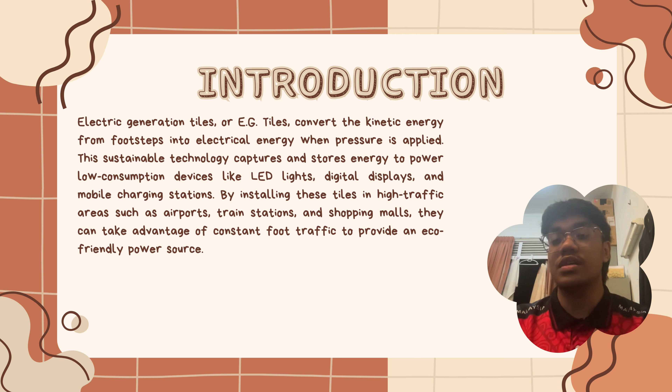So, electric generation tile, or we call it EG tile, converts the kinetic energy from footsteps into electrical energy when the pressure is applied. This sustainable technology captures and stores the energy to power low consumption devices like LED lights, digital displays, and mobile charging stations. By installing these tiles in high traffic areas such as airports, train stations, and shopping malls, they can take advantage of constant foot traffic to provide an eco-friendly power source.

Our research background is to develop an innovative electric generator tile using a crank and slotted lever mechanism instead of piezoelectric materials. As people walk on these tiles, their foot pressure activates the lever system, converting kinetic energy into electrical energy. Unlike traditional piezoelectric flooring, which is costly and faces efficiency and durability challenges, this alternative design offers a simpler, more affordable solution by utilizing physical displacement.

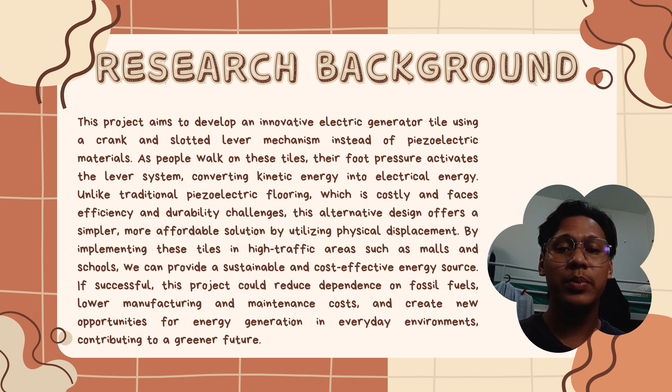By implementing these tiles in high traffic areas, such as malls and schools, we can provide sustainable and cost-effective energy sources. If successful, this project could reduce dependence on fossil fuels, lower manufacturing and maintenance costs, and create new opportunities for energy generation in everyday environments, contributing to a greener future.

Our problem statement is, with the limited supply and environmental impact of traditional energy sources, the need for sustainable alternatives is becoming increasingly important. Electric generation tiles offer a promising solution by converting the kinetic energy of footsteps into electrical energy. However, several challenges must be addressed, including energy conversion efficiency, durability, affordability, and integration with existing power systems.

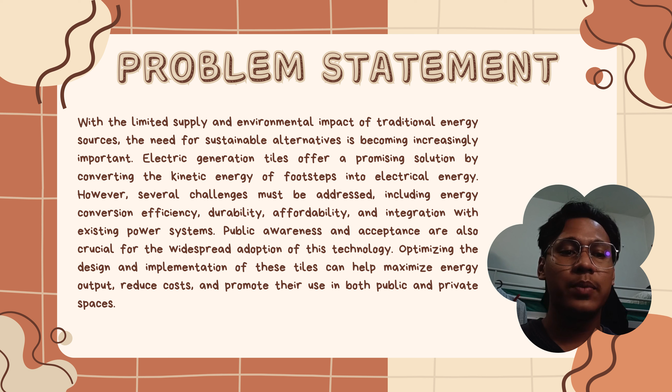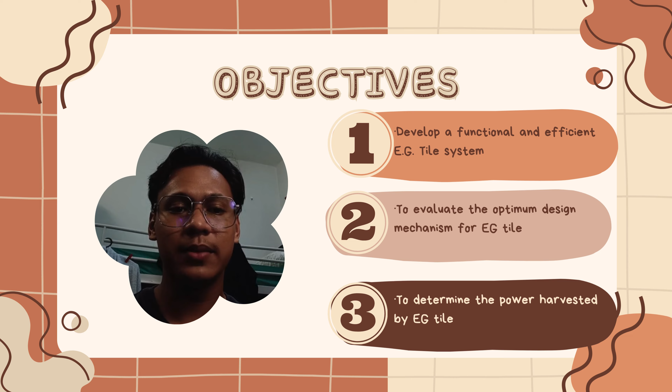Public awareness and acceptance are also crucial for the widespread adoption of this technology. Optimizing the design and implementation of these tiles can help maximize energy output, reduce costs, and promote their use in both public and private spaces. Our objective is to develop a functional and efficient EG tile system. Number 2, to evaluate the optimum design mechanism for EG tiles. And lastly, to determine the power harvested by the EG tile.

Our project scope is focusing on developing an innovative EG tile system that converts kinetic energy from footsteps into electrical energy. The design includes a functional prototype capable of generating 12-volt DC electricity, featuring a stepping plate decorated with mosaic elements as the user interface. To enhance the durability and efficiency, a customized 3D printed mechanism is incorporated.

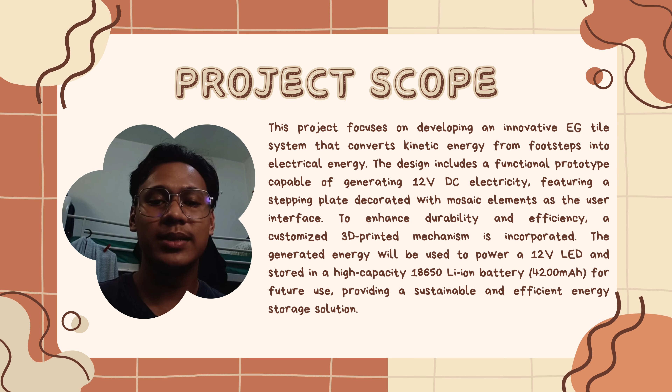The generated energy will be used to power a 12-volt LED and be stored in a high-capacity 18650 lithium-ion battery for future use, providing a sustainable and efficient energy storage solution. The EG tile system is expected to significantly reduce the carbon footprints of facilities by harnessing renewable energy from kinetic motion. This adaptable solution can be installed in various locations, especially in high foot traffic areas. By capturing energy from everyday activities, the EG tile system promotes a more sustainable and eco-friendly approach to energy consumption.

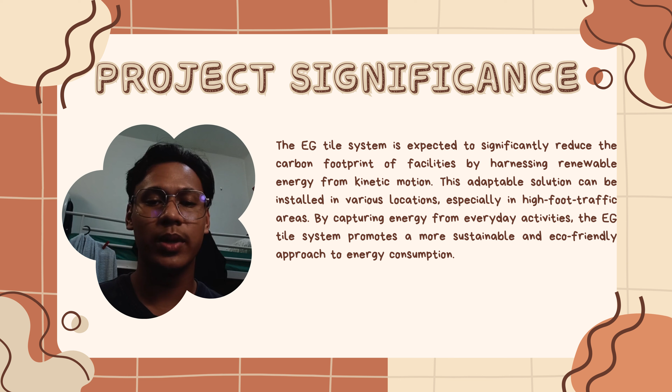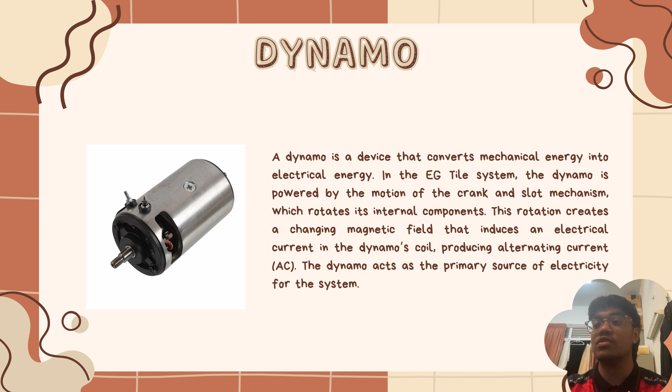So, the components in our project include a dynamo, crank and slot mechanism, gear, spring, bearing, and also an electric circuit. So, what is a dynamo? A dynamo is a device that converts mechanical energy into electrical energy. In the EG tile system that we use, the dynamo is powered by the motion of the crank and slot mechanism, which rotates its internal components. The rotation creates a changing magnetic field that induces an electrical current in the dynamo's coil, producing alternating current. The dynamo acts as the primary source of electricity for the system.

Our group has decided, instead of piezo, to use the crank and slot mechanism. Crank mechanisms are essential in many mechanical systems, converting rotary motion into linear motion or vice versa, and are widely used in various industries. Basic crank mechanisms are found in engines and manual devices, while slider crank mechanisms are used in piston engines and pumps for efficient energy transfer. The bell crank mechanism, with two arms positioned at a right angle, alters motion direction in aircraft control. The Scotch yoke mechanism provides smooth sinusoidal movement, ideal for internal combustion and steam engines.

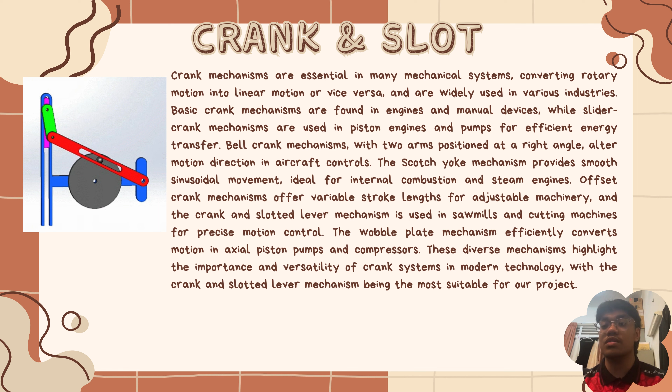The offset crank mechanism offers variable stroke length for adjustable machinery, and the crank and slotted lever mechanism is used in sawmills and cutting machines for precise motion control. The wobble plate mechanism efficiently converts motion in axial piston pumps and compressors. These diverse mechanisms highlight the importance and versatility of crank systems in modern technology, with the crank and slotted lever mechanism being the most suitable for our project.

So, what about gears? Gears are used to transfer motion and torque between parts of a machine. They have teeth that mesh with other gears to transmit rotary motion. Gears can change speed, increase or decrease torque, change the direction of movement, and help transmit power. Different types of gears such as spur, helical, bevel, and worm gears are used for specific tasks, making them essential in machines like cars, clocks, and engines.

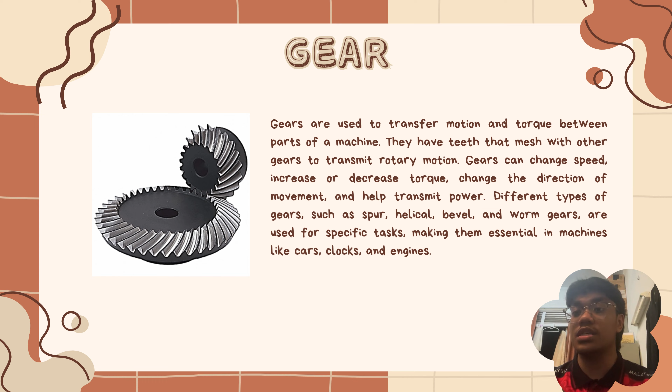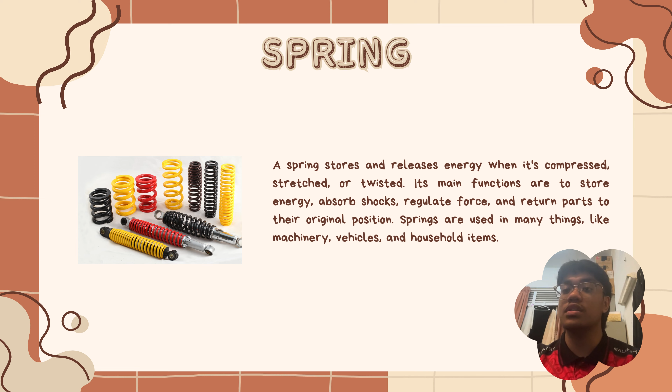Spring. A spring stores and releases energy when it is compressed, stretched, or twisted. Its main functions are to store energy, absorb shocks, regulate force, and return parts to their original position. Springs are used in many things like machinery, vehicles, and household items.

The most important part of our component is also a bearing. A bearing reduces the friction between the moving parts, making movement smoother. It supports weight, helps distribute loads, and allows the parts to rotate or move easily. Bearings are used in many machines like motors, wheels, and fans.

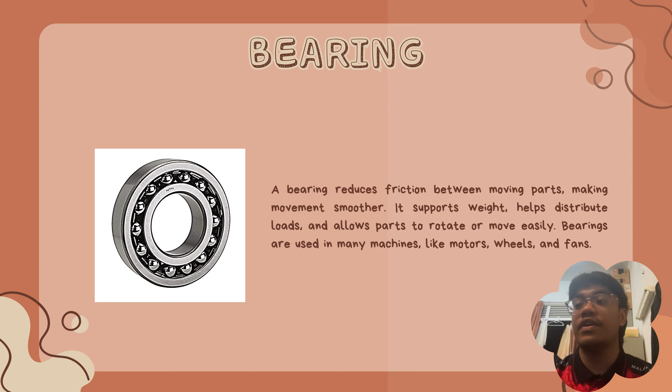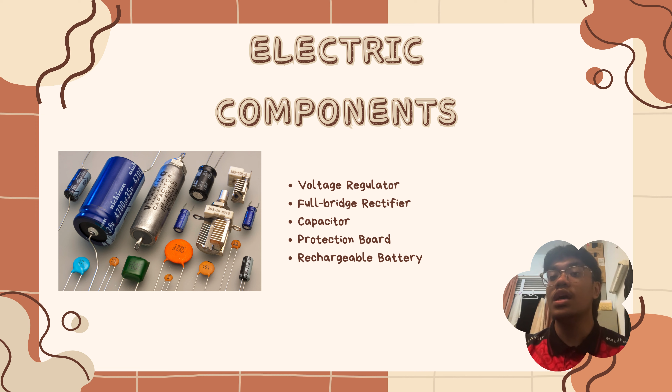And the last one will be electric components. So we decided to use some of the electric components that mainly function well in our project, which are the voltage regulator, full bridge rectifier, capacitor, protection board, and also the rechargeable battery.

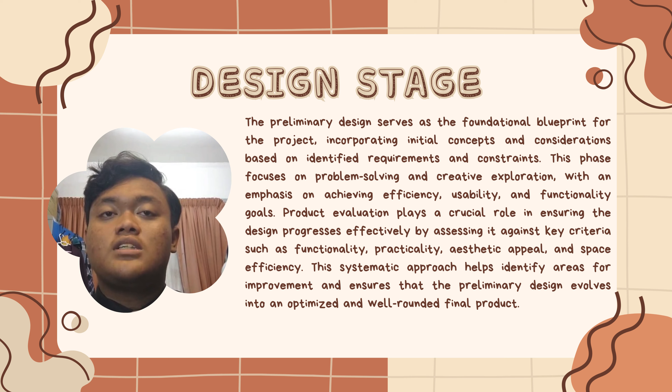Today I will present design stage and mechanism design. So what is design stage? Design stage is the stage that forms our foundational blueprint for the project. This stage incorporates initial concepts and considerations based on identified requirements and constraints. This stage focuses on problem solving and creative exploration. This stage helps us to identify areas for improvement and ensure that our preliminary design is optimized in our final product.

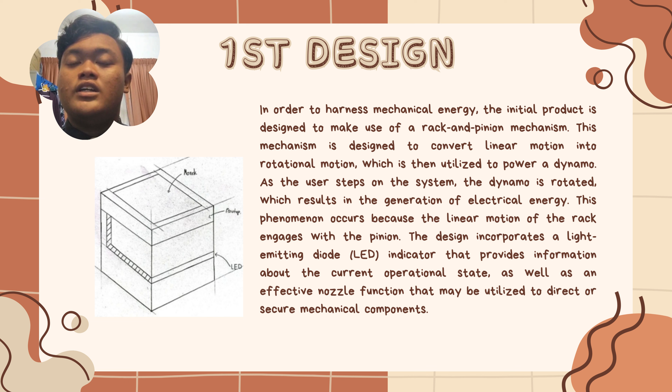In total, we have 3 designs, and this is our first design, suggested by me. I suggest using a rack and pinion mechanism, which converts linear motion to rotational motion. This rotational motion will be converted into electricity by using a dynamo. In this design, I also include LED strips that will indicate that our product is producing power.

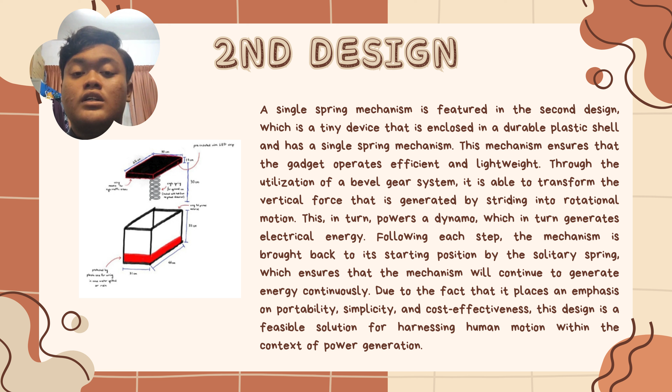This is our second design, suggested by Izwan. Izwan suggests using a single spring mechanism connected with a bevel gear system that will turn the dynamo and produce electricity. This is our third design. This design uses a rectangle design and 4 spring mechanism. The tile on top of it is connected to a multiple bevel gear mechanism. This multiple bevel gear boosts rotational speed and energy output for the best performance.

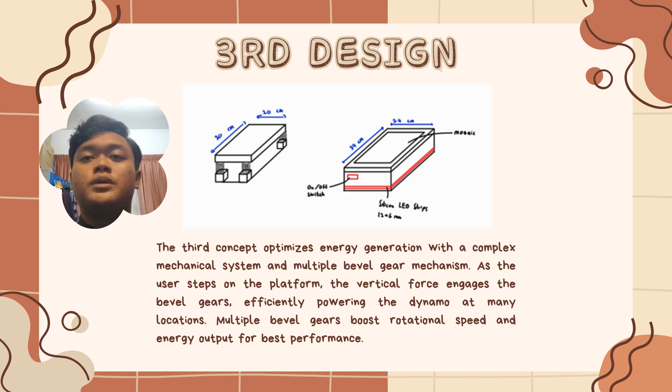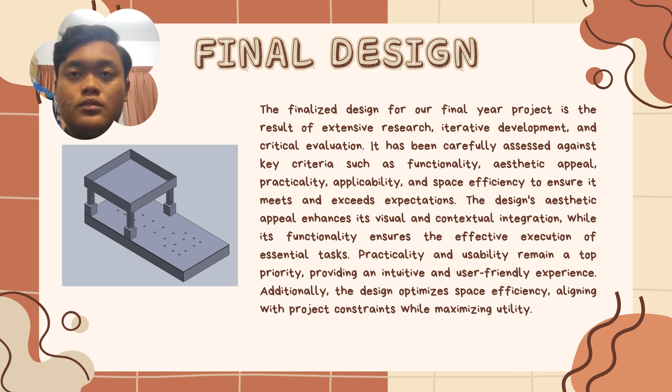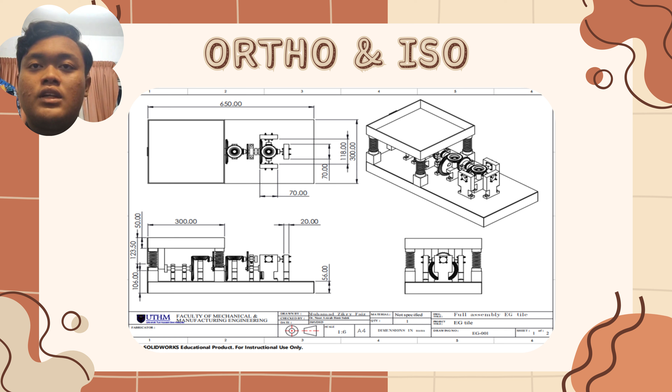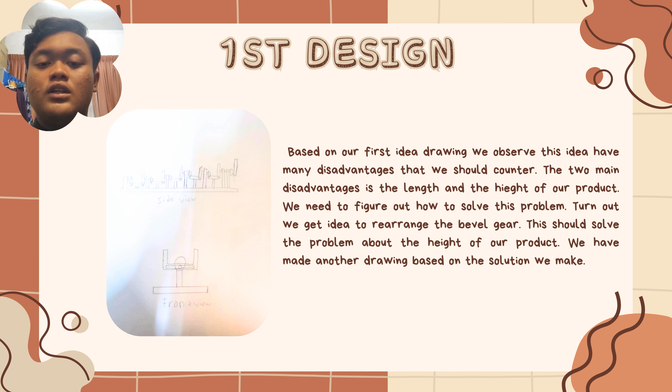Next, mechanism design. So in this project, we have changed our mechanism design 3 times. So this is our first design. We are using only bevel gear in the normal position. In this design, we found out that it takes a lot of space in terms of length and height.

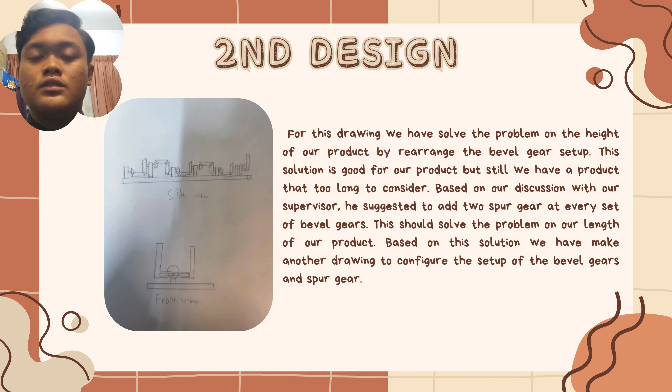So this is our second design. We use bevel gear, but this time we change the position. So we change the horizontal bevel gear position. First we put it at the bottom, and then for the second set we put it on top. So we repeat this position until the end of our bevel gear. We found this design has solved the height problem, but this product is considerably long. So we need to solve this length problem.

So this is the third and last design for our mechanism. We only use bevel gear and spur gear. For the bevel gear position, we put the horizontal bevel gear at the top, and the small vertical bevel gear is connected to a shaft that has a spur gear on it. We only use 3 sets of bevel gear and 2 sets of spur gear. In this design, we have solved the problem: we have cut the height and the length of the product.

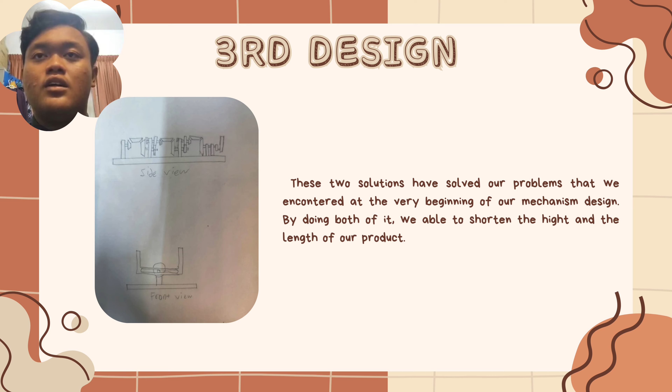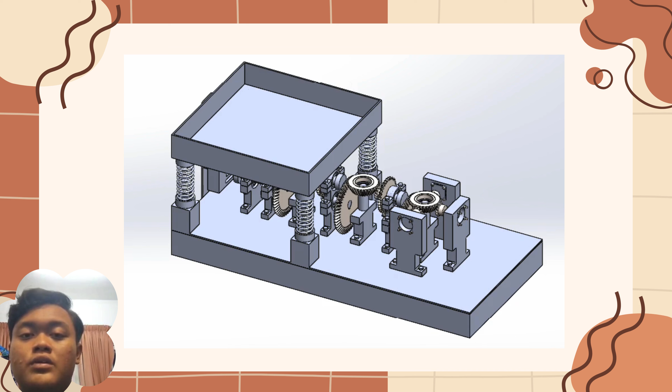This is our animation. So we arrive at the conclusion. The electric generator tile project demonstrates the potential of harnessing kinetic energy from foot traffic as a sustainable energy solution. By using a crank and slot mechanism instead of traditional piezoelectric materials, the project effectively addresses cost, durability and efficiency challenges. Through careful material selection and iterative improvement, the design is optimized to generate and store electrical energy for low power applications such as LED lighting.

The successful implementation of EG tiles in high foot traffic areas like schools and malls can contribute greatly to renewable energy efforts and help reduce carbon footprints. Future improvements could enhance the energy conversion efficiency, optimize the design for mass production, and maybe explore better energy storage options, making the EG tile a promising step towards sustainable infrastructure.